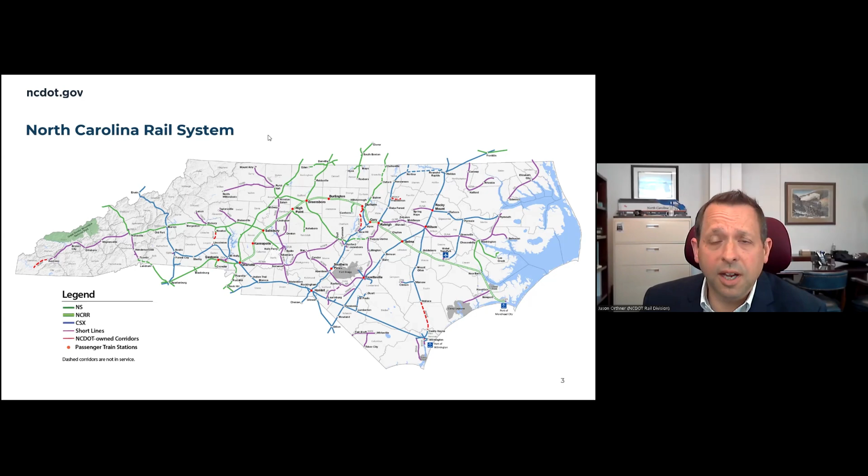One of the things that we've done over the last couple of years is evaluate the economic impact of North Carolina's rail system on our economy here in the state. What we determined through this analysis, which we did with the Institute of Transportation Research and Education, a component of North Carolina State University, is that the system contributes about $20 billion to our economy here in North Carolina on an annual basis, and supports about 88,000 jobs, both direct and indirect. That's $990 million in state and local tax revenue, with currently about 860 businesses loading onto the rail and 116 actual rail-served or rail businesses in our state.

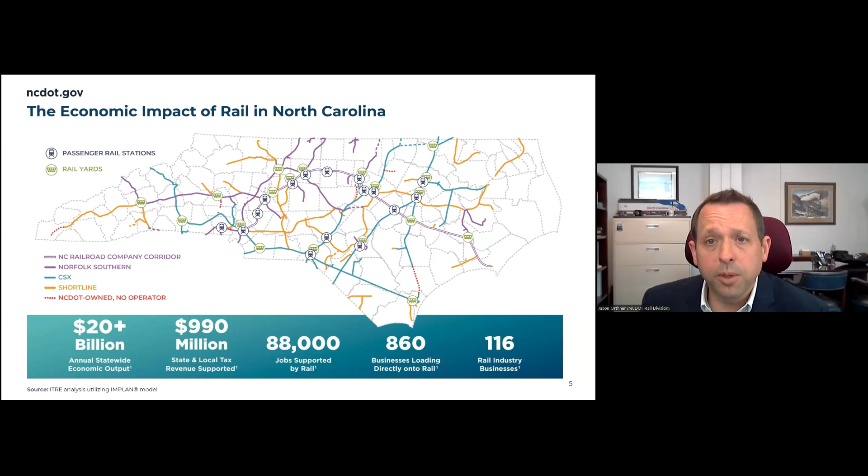So it is definitely an economic engine in our state, the rail system. And this is really across all the different facets of the rail industry here in North Carolina, which includes the railroads, the private railroad companies, our passenger rail services, the railroad supply industry, and the railroad businesses that are impacted by the system.

About half of our budget here at NCDOT Rail Division is dedicated to one large program called the Freight Rail and Rail Crossing Safety Improvements Program. This program was established by our General Assembly back in 2013, with the goals of improving rail safety through crossing safety improvements, modernizing the rail system's track infrastructure, supporting economic development, ensuring that things that can be hauled by rail are hauled by rail through freight diversion, increasing the freight capacity of the rail system, and preserving the rail corridors across our state.

It's an incredibly important program to us, and it has done a lot over the approximate 11 years we've had this program in implementation. Over $1.2 billion in private capital investment has been generated by the matching funds we provide through the program. There have been 34 new industry expansion projects, over 2,500 jobs provided through the program, and lots of bridges, railroad crossing improvements, railroad crossing closures, and support for our ports here in North Carolina, all part of this initiative.

So this is a major element of what we do here, and you can see the impact of this program throughout our state. We've had projects with railroads, industries, and other entities, including counties and municipalities, to really bring great value and benefit to the rail system and grow the economy both on a state level and on a regional and local level.

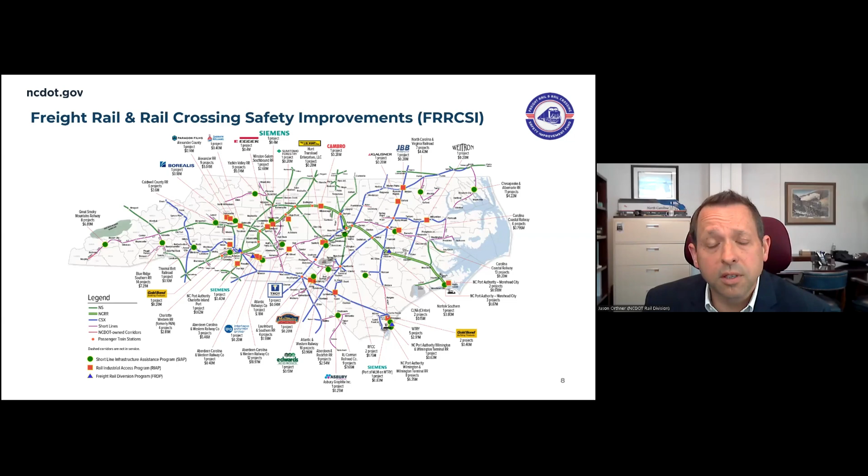The other thing we do at the Rail Division is have oversight of all the public crossings in our state. We manage those both from an inventory perspective, but also manage both the federal and state programs to improve crossings, adding warning devices, closing crossings, and grade separating others.

We've closed about 314 crossings since 1993, removing those permanently as exposure to the rail system. Currently we have about 20 crossing consolidation or closure projects ongoing, 16 grade separations primarily funded through our state transportation improvement program, and then 65 grade crossing warning device projects, primarily funded through our Section 130 funds.

Every year we're inventorying about 1,200 crossings through our system, and then working with USDOT to prioritize those to go into the system. So this is really the bread and butter type of work that our division is doing.

So I'll turn to our very successful passenger rail service next. I've shown this map before. It represents both our state-supported services, which are the Piedmont and the Carolinian, as well as the routes of 4 intercity long-distance routes that Amtrak operates through our state, and connecting Amtrak Thruway coach service to communities in the eastern part of our state.

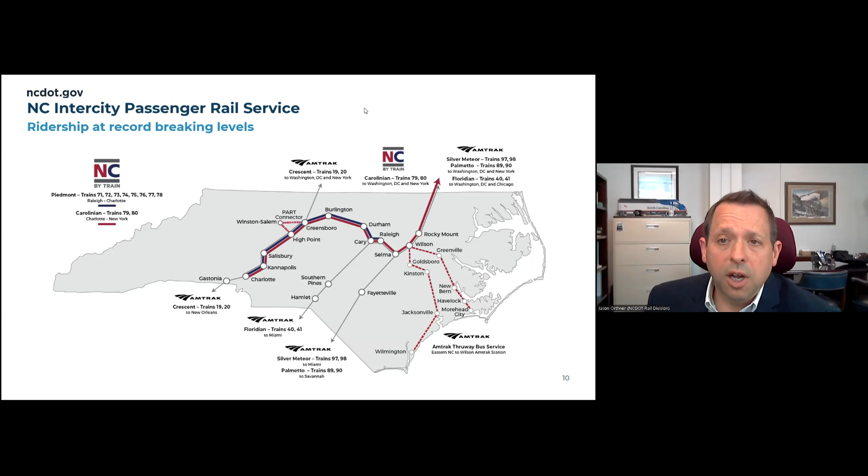It's taken us a while to get to this point. One of the things I like to demonstrate is that we've developed our program incrementally over many, many years. The Carolinian service actually started in 1990 as our first major sponsored service, and has been operating continuously since that time. That really grew out of a blue ribbon task force under Governor Jim Martin at the time, which led to the implementation of that service.

Since then, we've done a number of infrastructure and operating programs to grow the service, starting with the introduction of the Piedmont in 1995, its first round trip. A series of improvements were made between Raleigh and Charlotte, with heavy emphasis between Raleigh and Greensboro — what we call the North Carolina Railroad Improvement Program — that reduced travel time by about an hour, down from 4 hours to around 3.

And then the Piedmont Improvement Program, which was our largest federally funded program up until now with the S-Line. So as we look forward, the Corridor ID program on the Raleigh-to-Richmond corridor over the S-Line really is our major initiative for expansion of passenger rail service as we head into the next phase of improvements.

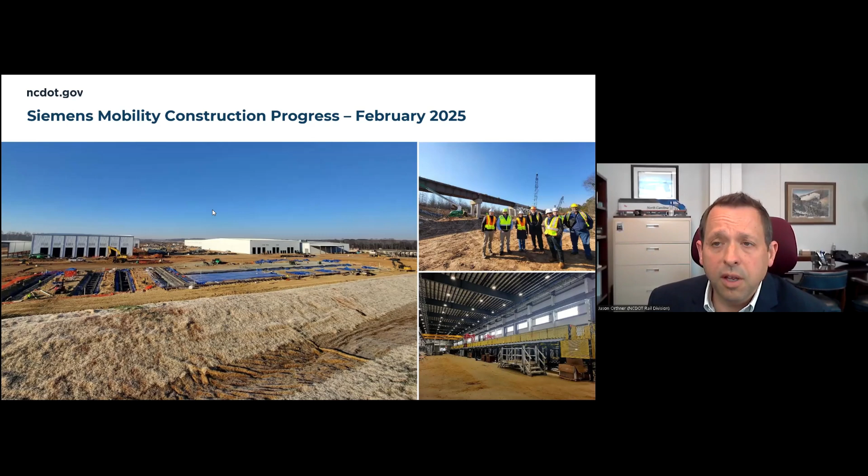Talk a little bit about Charlotte Station. This project is our major, yet-to-be-touched location to really drive a good experience for our passengers at the busiest location in North Carolina. We've done great work to nearly every station in our state where our current services operate. This is the one that's really the last major station upgrade that we need to do under the current stations.

If you've been to the current station, it's basically outside of uptown Charlotte. It does not have good accessibility, and the site can be prone to flooding and major weather events. It's undersized for the busiest station in North Carolina. This is our busiest station.

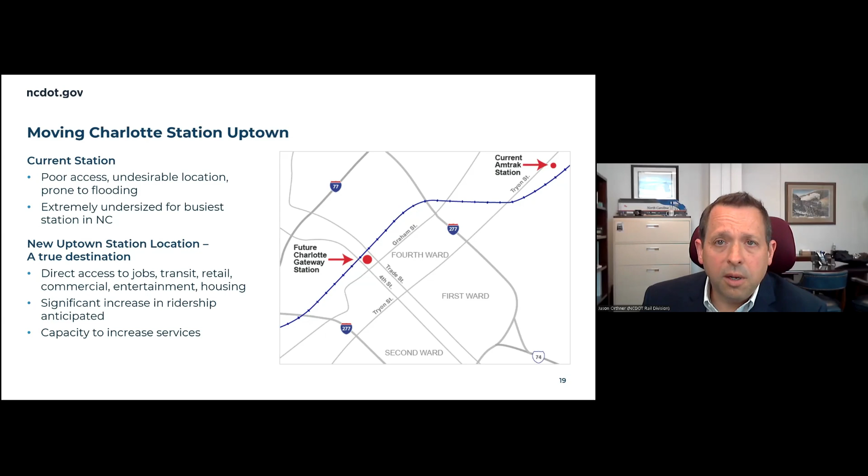So the new uptown location puts the station right next to the Panthers stadium and right next to the business district in Charlotte. Direct access to jobs, transit, retail, commercial, entertainment, and housing. And we anticipate, as a result of the relocation of the station, a major increase in ridership and a capacity to increase our services over what they are today as well.

And right now we're working with the city of Charlotte on a major effort to build the infrastructure to board the trains at this location. So upfit of the platform and concourse, as well as a station head house, is what we're working on right now. Looking at both early and final station development for this site, as the city is working with both the P3 partner and other stakeholders to deliver this very important element. And we hope to see this come to fruition in the very near term future.

I did want to present real quick, as part of the uptown Charlotte Gateway Station location, we have a component project that's associated with that called the Charlotte Passenger Rail Facility. This is a facility just to the south and west of the Charlotte Gateway Station site, where we will be facilitating the maintenance of the trains, both in near term and the Airo trains that will operate over this segment.

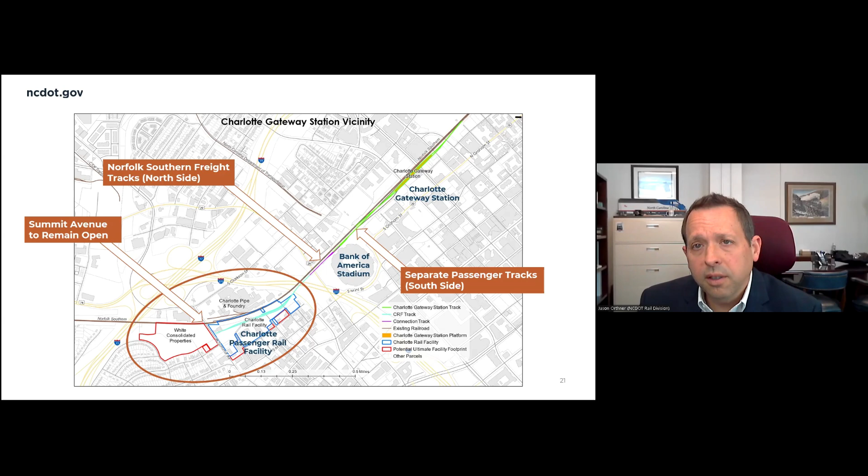One important thing is that the Gateway Station and the passenger rail facility will be connected through separate tracks from the main line, so the trains that access the facility don't ever have to get back on the main line and interact with freight traffic through there. So it creates a tremendous degree of efficiency over the current operation, where our trains hold on the main line for periods of time at the old station location.

All right, turning to the Southeast Corridor and the S line. This is a graphic showing our connection to the Commonwealth and all the different line segments, both through current service planning and through Corridor ID that we're currently evaluating for our various corridors, with the trunk line being the Washington D.C. to Richmond to Raleigh to Charlotte corridor. S line being the very middle of that critical, key Southeast corridor.

As we've mentioned before, this line segment will create significant time savings by creating a more dedicated passenger route between Richmond and Raleigh, allowing for up to an hour and a half of travel time savings, and increased reliability because of the ability to operate independent from the very congested freight corridors, creating new rural and urban connections, economic development opportunities in the communities it will serve, as well as safety benefits from giving folks more access to the intercity passenger rail network, less exposure to highway accidents, and freeing up the highway system for future trips so there's more fluidity potentially on the highway system.

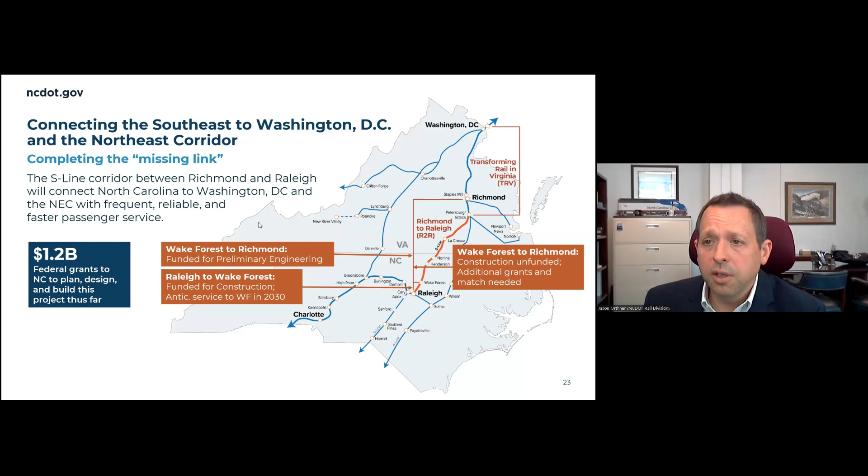So as I mentioned, our grant was announced for the Raleigh to Wake Forest segment at the end of 2023. That allowed us to really enter into a series of both match-funded projects as well as the engineering of the project. So we've already broken ground on the first project of the S-line portfolio of projects.

That is the Durant Road grade separation in North Raleigh. That project is now under construction. We'll build a bridge over the track at that location on a multi-lane highway. Additionally, New Hope Church Road, also in North Raleigh, has been let to contract, and it will begin construction shortly here in 2025.

We've also been hard at work with the communities all up and down the S-line, the 7 communities you see represented there, both north and south of Raleigh, looking at station sites for those locations. In January, a $13.2 million BUILD grant was awarded for the development of the Wake Forest station, which is critical to the S-line, the first phase of the S-line project, to make sure we've got a really solid station for that first station about 18 miles north of Raleigh.

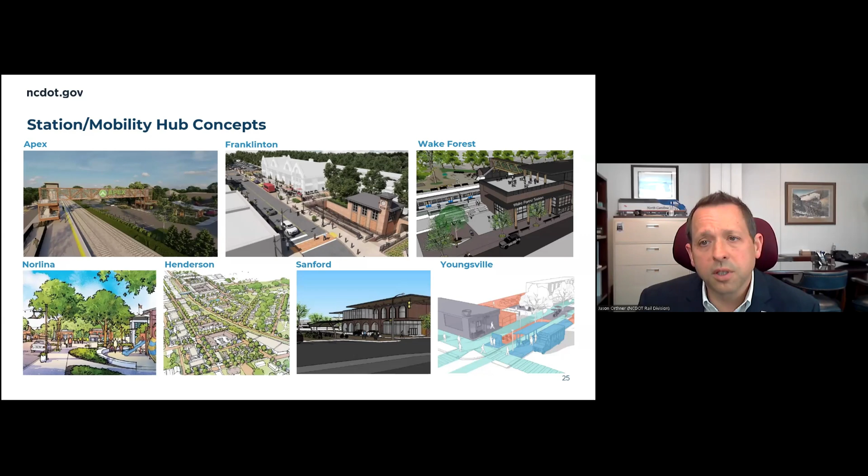A little bit of detail here on the Raleigh to Wake Forest project that's funded for construction. It represents a total of about $1.4 billion worth of work. You can see the route and the alignment there. As I mentioned, this is a very urbanized corridor, with the first approximate 2-mile segment being incredibly urban coming out of Raleigh, to the point where we're building basically a new alignment for that first stretch so we don't interfere with freight operations for CSX, NS, and the short lines.

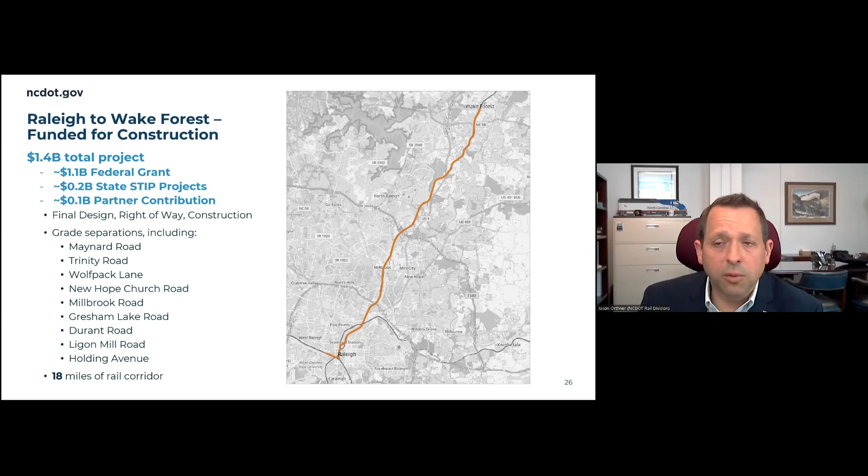There are about 11 grade separations that we are going to be completing with this work, as well as 18 miles of rail corridor construction. Final design, right-of-way, and construction are the elements that we'll be building as part of this.

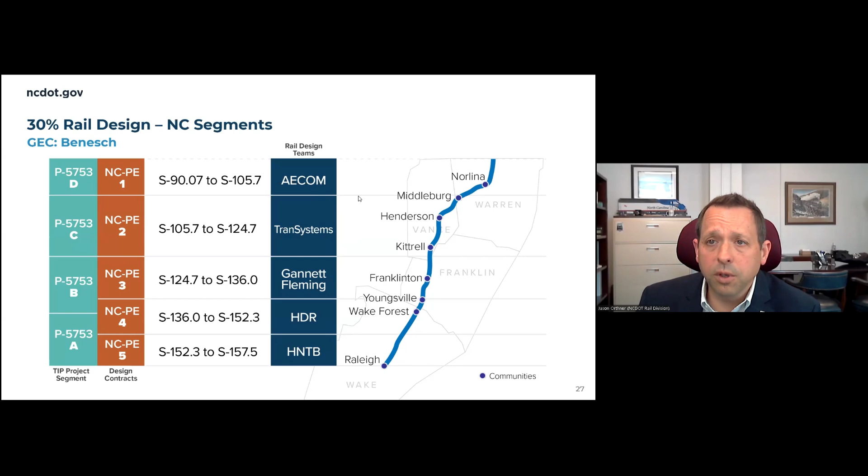Just kind of breaking this down a little bit further, I mentioned that we have the preliminary engineering for the full Raleigh to Richmond under a CRISI grant that was awarded back in 2022. We have awarded the designs for both the track and the roadway components of that project. So you can see here that we've broken into segments, and we have different design teams working on the rail network segments.

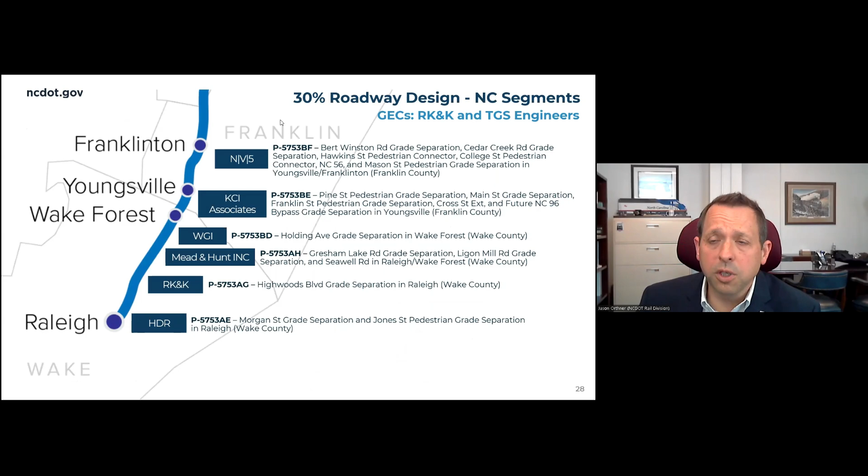And on this slide, you can see the highway designers that we've brought to bear here. So about 40 engineering firms engaged with us right now on this particular element of the project. I won't list them all, but there's a lot of work to be done.

So the economic impact, we finished about a year and a half ago an economic impact assessment of just what this first phase of work accomplishes from an economic impact standpoint, and determined about $1.38 billion in the 8-year period from now until 2033, due to the work around just the implementation phase of this work.

This does not even consider the ongoing economic impact of this project to the regions, both in mobility and what they do around their stations, and just the flexibility of the citizens and the amenity this brings to their citizens. But you can see there over 8,000 job years, which is employment of an individual over 1 year, and 42.5 million in state and local tax revenue gained just for this one Raleigh to Wake Forest project.

Before I go into the corridor ID slides I wanted to speak to this as well. We've been partnering with the North Carolina Railroad Company and Norfolk Southern on a project to make improvements between Greensboro and Raleigh on the North Carolina Railroad Company corridor. This project will basically build new sidings, some new double track, including a major grade separation, rail replacement, bridge analysis, and several other items that go along with it.

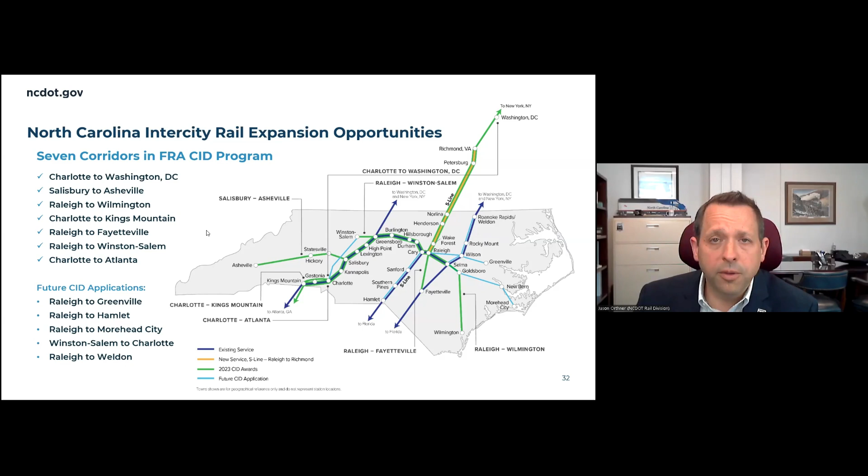Very exciting. We are fully in step one of this program, which is the scope, schedule, budget phase of the project. We do plan on resubmitting, perhaps in a slightly different format, the 5 that were not selected in our original round of corridor ID, and we're continuing to do feasibility on those corridors as we prepare them for future CID applications.

We've been having lots of communication with the communities that these corridors serve, making sure that they're aware that we are scoped and fully underway with our step one for all 7 corridors, which is fully federally funded for that step, and seeking the necessary matches for the future steps, with step 2 requiring the 10% non-federal match, and step 3 and beyond requiring the 20% match. So that's a conversation we continue to have with the corridor stakeholders as we advance these projects.

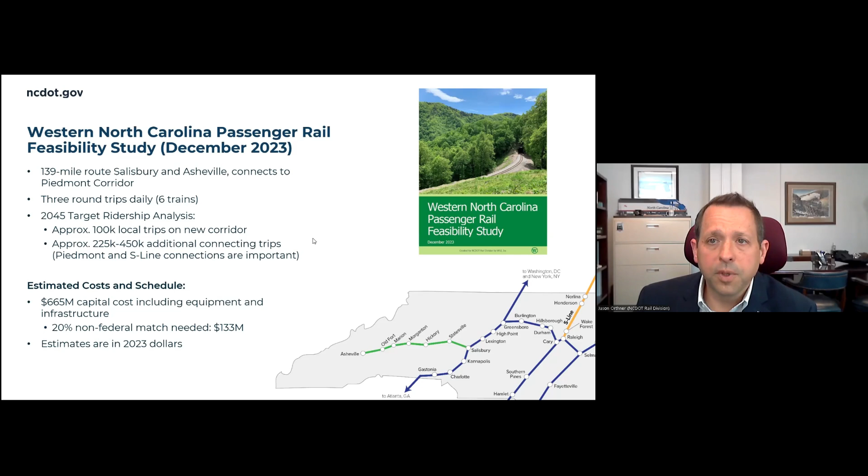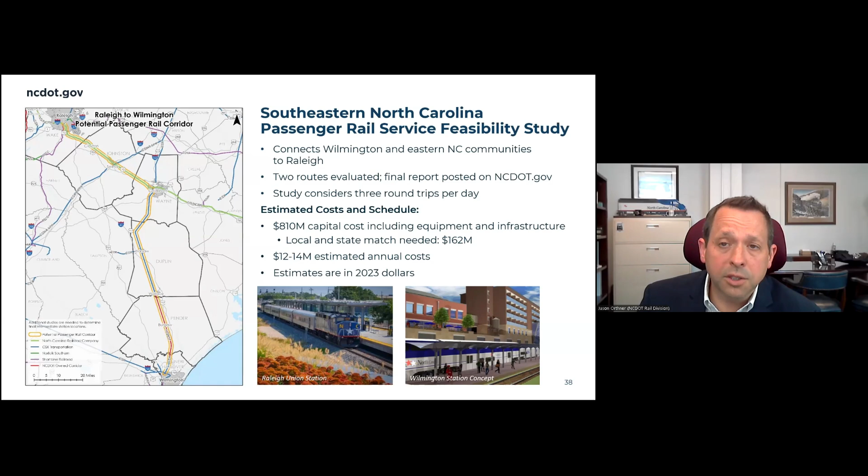The estimate here, in 2023 dollars, was $810 million, including all necessary equipment and infrastructure, with a local non-federal match of $162 million. Again, this corridor demonstrated that its connection to the S line was vital to ensure local passengers had many more destinations off of the corridor.

That brings me to the end of my slide presentation, so I'd be happy to take some questions.

Excellent, thank you Jason. I have family in Wilmington, so they're very interested in that train service connection and visiting the rest of us in Virginia—just a little hint on priorities. But all joking aside, we have a lot of good questions.

The first one is, with the rail crossing and safety programs, have you seen a significant decline in the number of train and automobile interactions?

That's always a big goal of those type of programs, and something that seems to be happening more often with folks focusing on their phones versus other activities they should be doing.

We've been at crossing safety for a long time, really since the early 1990s, where we developed the Sealed Corridor Initiative, which looked at a comprehensive way of tackling both safety at crossings that remain and eliminating redundant crossings. Over that period we saw a precipitous drop in grade crossing accidents and fatalities through that program.